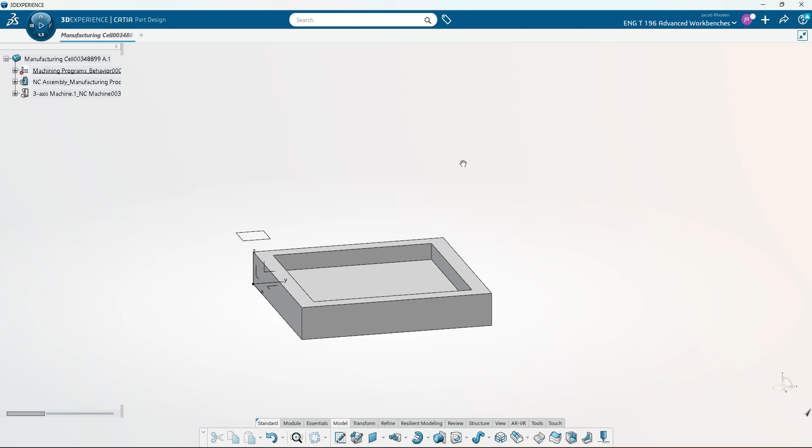Here we can see the same part that we had previously with the pocketing, and we can see we have our safety plane and everything. So if we jump into prismatic machining, as I've said a couple times in some of the other videos, when you are starting out with a part, you want to make sure that you are facing it.

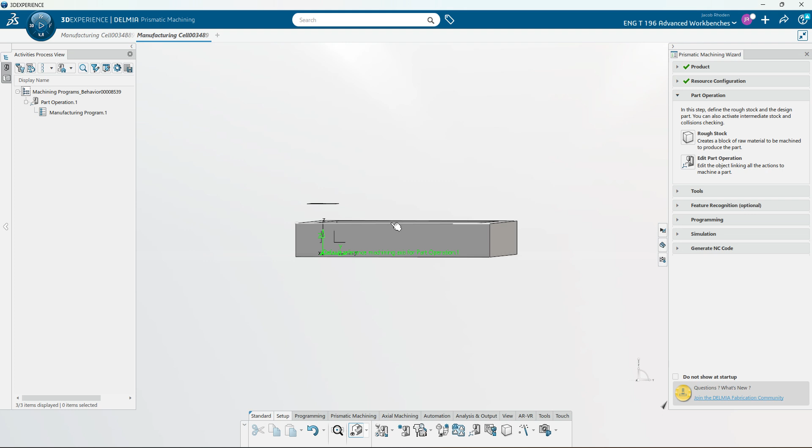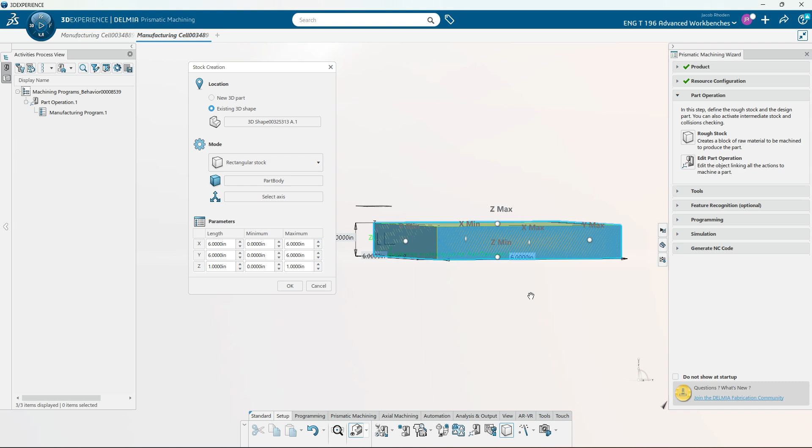When we make our rough stock, if we select the 3D shape, we can see that when we were doing pocketing, we just had this stock that fit to the proper size and dimensions just so we could show off that pocketing. But now what we're going to do is something a little bit more realistic to if you had an actual piece of stock, which would have a rougher finish and might not necessarily be square, so you'd have to square it up.

One quick way to make something square is by doing a facing cut. You want to make sure that the height is right, and you want to make sure that this is as flat as you can get it. So to start off, we can't just do a facing cut since right here we don't have any material to do a facing cut.

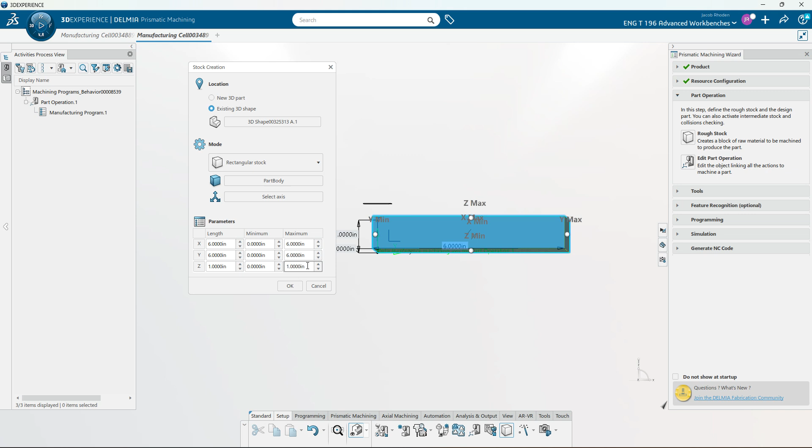So we can see our Z max right down here. We'll make our Z max just 1.125, why don't we? And we can see that raises it up a little bit. You can see right there, we've got a little more material on the top. We'll say that maybe the bottom's already faced, so we're not worrying about it too much.

And then we can press OK. That'll create our rough stock. You can see it goes up in the Z a little bit more. And then let's hide that, edit our part operation, same as always.

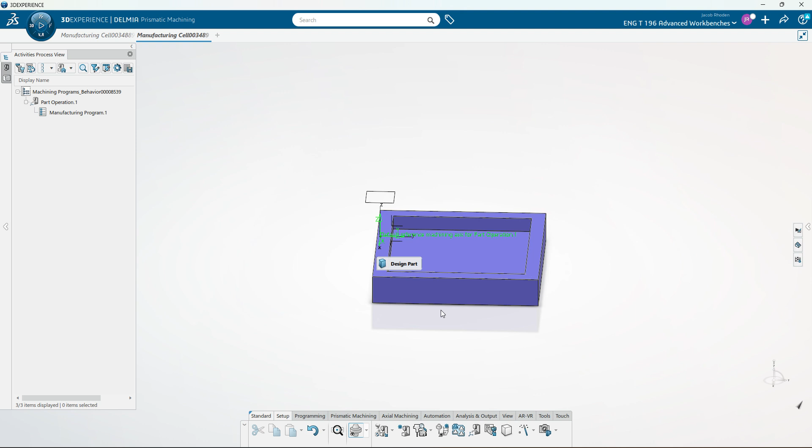Select our rough stock. Make sure that gets hidden and that we select the right thing. There we go. Let's select our safety plane.

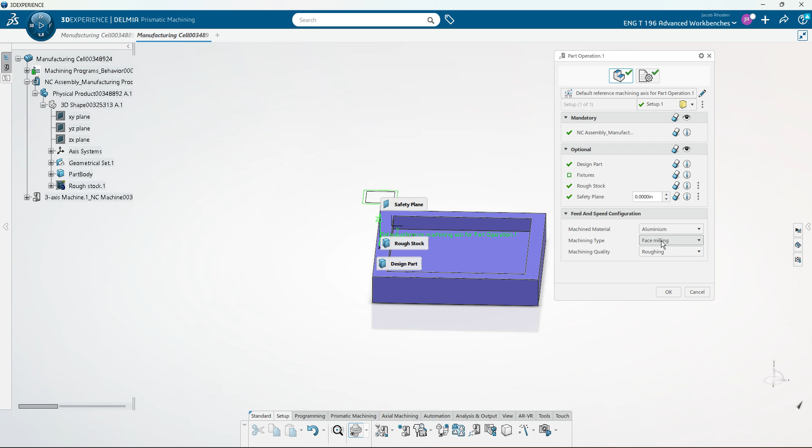And then with the feed and speed configuration, if you're doing that, there is a face milling option for facing that we want to select. Press OK. Now we have a new tool that we're going to be making, so obviously it's in milling items. We have our face mill tool.

And you can see this creates a large flat tool. Now depending on the tool that you're using, you might have to actually take multiple cuts. Just for this example, since we're not too worried about any actual tool life or anything, we have our height right here, which we'll just make 0.2. And that'll be more than enough to take this whole cut in one layer without having to cut it and then drop down a couple thou, and then cut it and then keep dropping down.

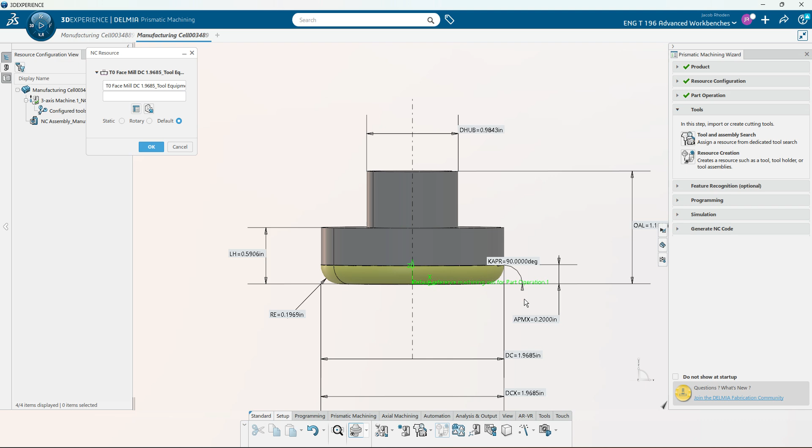And we're not going to have to change any size. Obviously, depending on what you're facing and what features there might be around it or in the way, you'd have to change the width of this and the diameter and the size and everything. But for now, we're not going to have to worry about it.

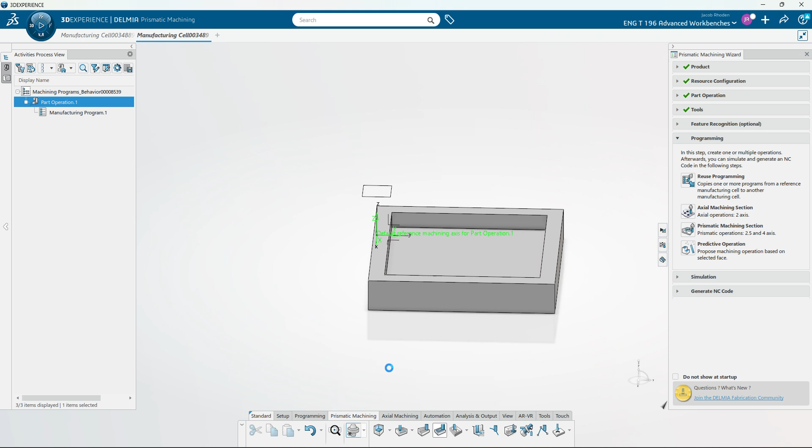So we'll make our tool, and we'll go to programming. It's going to be under prismatic machining, right down here, and we've got facing. And then we'll go select our tool, our face mill.

And then here we're going to see, just like with pocketing in a pictogram, you want to select the bottom plane, which here is going to be the top plane, but it's going to be where your facing is going to be finished. So we'll select this, our top plane for our part. You can see that there. And obviously we have our different options.

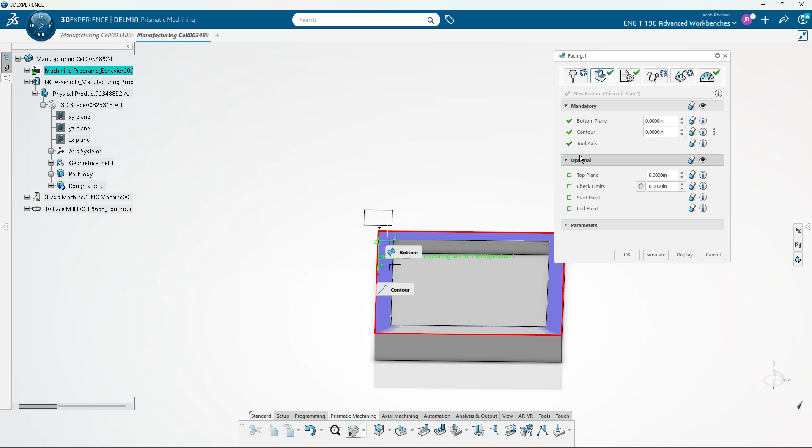So if you wanted to, you could go and show this rough stock. If you wanted to, you could select the top plane, and the rough stock's not going to show. Maybe that.

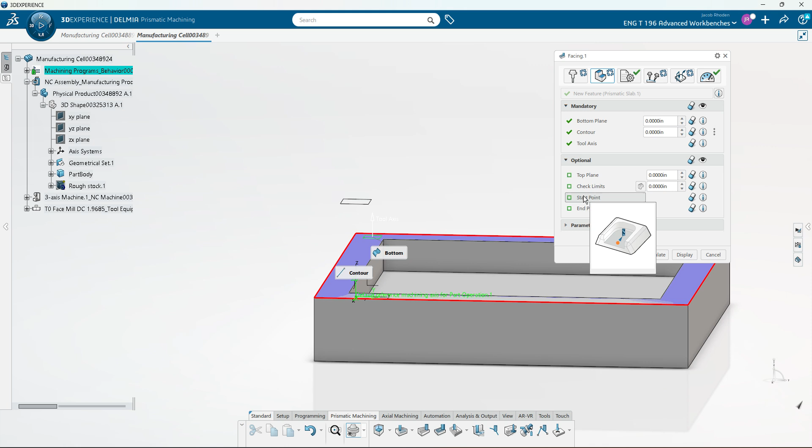If it was showing, you could select the check limits, your starting and end points, and then your top plane. And then in here, obviously, we have the tool that we have selected and our strategy.

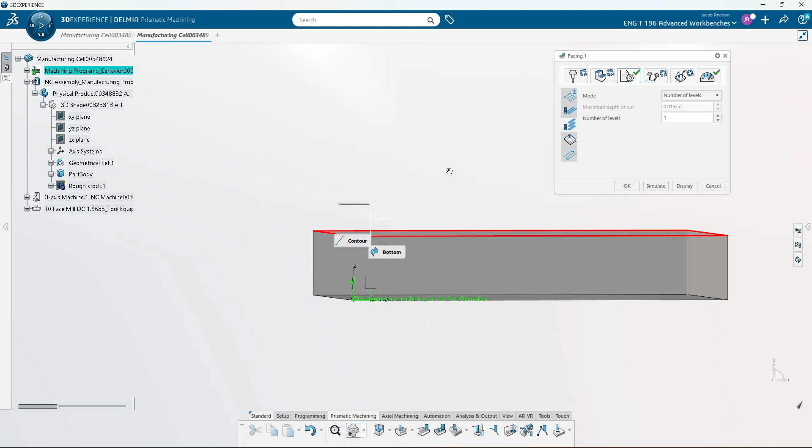This is kind of, if you go in here, you have your number of levels, and this would be if you had a lot of material that you're trying to face off quickly. You might have to go in here and say how much you can take off per level and how many levels you need to take off. So it could face, and then face, and then face until you have everything to the right size.

And then we have finish passes and all that kind of stuff. Tool axes, which we're not worried about. And then obviously we have our macros, which is the same as usual.

So here, we're going to do our approach, into our safety plane. And one thing you can do with these macros, so we have our approach, and we know our linking approach is going to end up being the same, so we can just press copy right here and go to linking approach and paste that over.

And we can do the same with the retract. So we can click on this plane, click on that safety plane, press OK. You can copy that retract, then paste it to that linking retract.

And if we go into edit, we can see obviously that's selected at the macro plane right there, so there shouldn't be any issue about that retract. You can see clearance, all these linking retracts look alright. And then we have our speeds and feeds and everything.

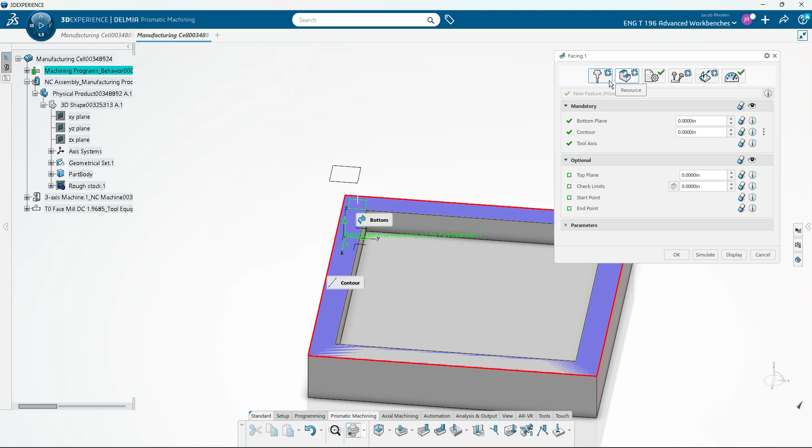Let's go in here and turn this speed down. But you can see where those green lines are. That's going to come in, drop down, and then go around and face all this.

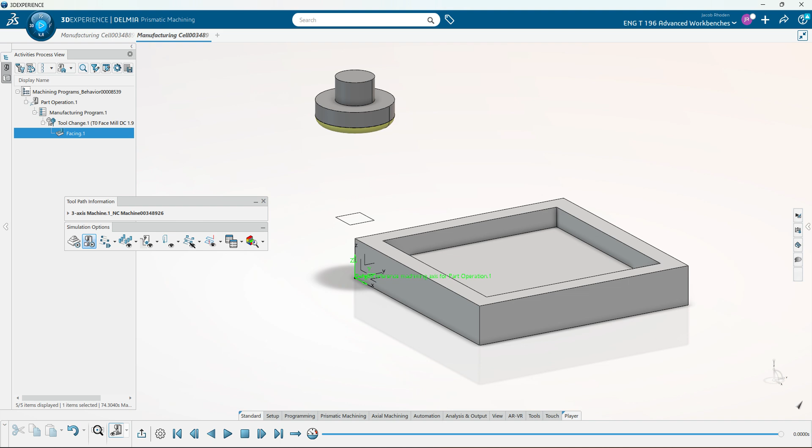If we press go... why is it doing that? Oh, there we go. Now we only got one face mill. And you can see it's just real quick gonna come down, spin around. Looks like it's gonna take about 74 seconds for it to come down and mill all that out.

And then if we look at our actual stock, we can see it come in... trying to see if I can pause it. Yeah, there we go. And then you can see, obviously this is the material that we have.

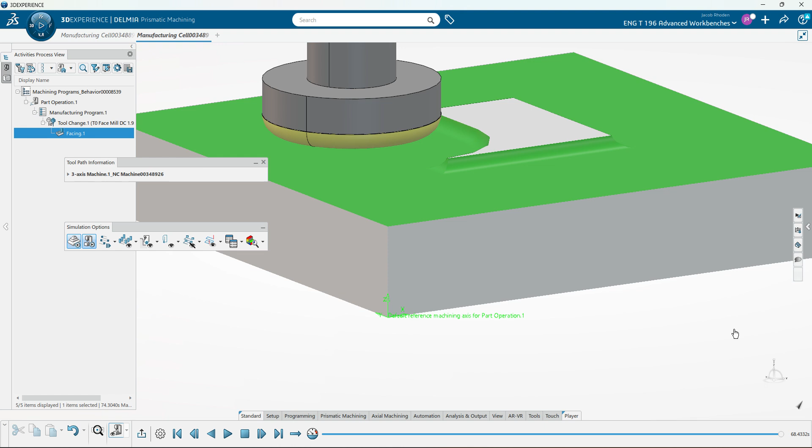Our tool height's greater than that, so we're not having to worry about it. You can see it's just coming in, taking that material out from the outside in, and this will be nice and flat.

And depending on your tool and even your machine, your tooling, this might be, even this could be too much for you to face at once, so you might just have to take it in steps and everything. Yeah, that's how you do facing.

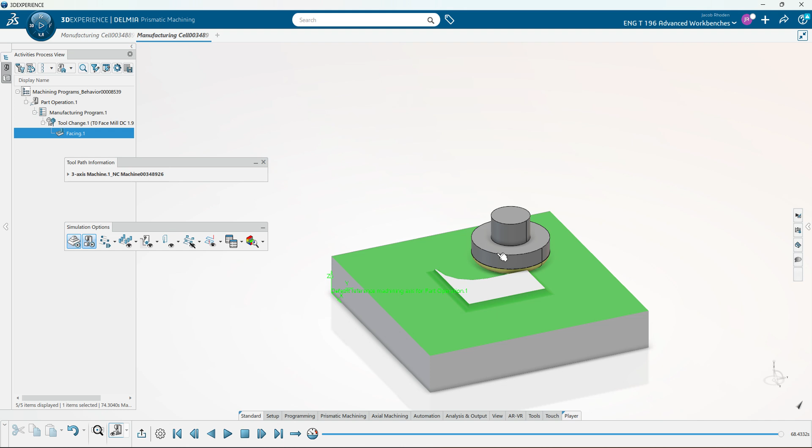And then once you were done with this, you could just add in your pocketing. So now you have this nice flat face. You can put your pocket in and just add that right after your facing, after a tool change.